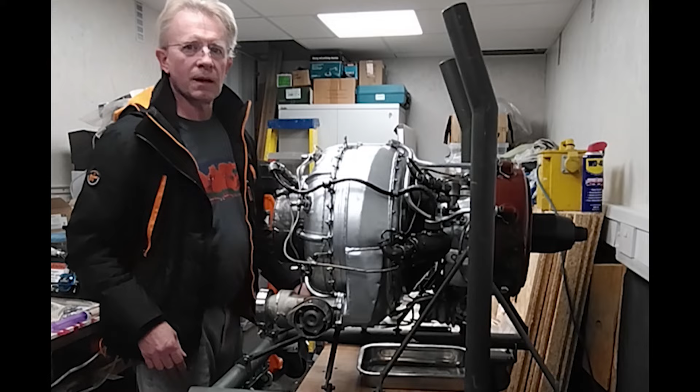Hi, some of you may have seen my AI-9 jet engine videos before, but today I'm going to go through a build. This is the engine that we're actually going to see by the end of the day. At the start of the video it'll all be in pieces. One problem I came across, it's rather a long build. It lasted 3 days, so I'm going to split the video into 3 parts.

So this is the engine we're going to be looking at. It's a single stage gas turbine used by Russian military and commercial airlines. It's around about a 50-year-old design, so a lot of these engines that have been in circulation have been changed for electric starter motors, because this is basically what it is, a starter for the larger engines on aircraft and helicopters.

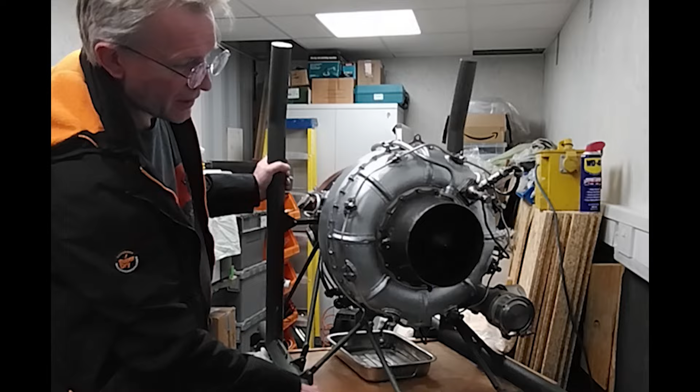The idea of the actual machine is we've got a valve down here, which is the key part of this engine. It actually spins up to a core speed of around 40,000 RPM, and once it really gets going, we can open this valve and that will produce massive amounts of airflow. That gets piped down to the big engines, and that will spin the turbine blades in those, and it will start each engine. It's used to start each engine in turn.

With this being the older model, the newer ones actually have a generator on the back and can be used to generate power for batteries and what have you. Yeah, I got a pair of these engines. I've been demonstrating one for a while that I've actually built. This is the one that needed a bit of a rescue.

Made components for it. I've got my own little workshop, and we've actually made different casings, some aluminium castings. There are some special high temperature bearing seals that we've made. We've made a plenum chamber cover, which is this one here, the green part. So we've made quite a few different bits and pieces, and this is the culmination. I haven't started it yet. That'll be another video that comes later. So yeah, take your time, watch the video, see what you think.

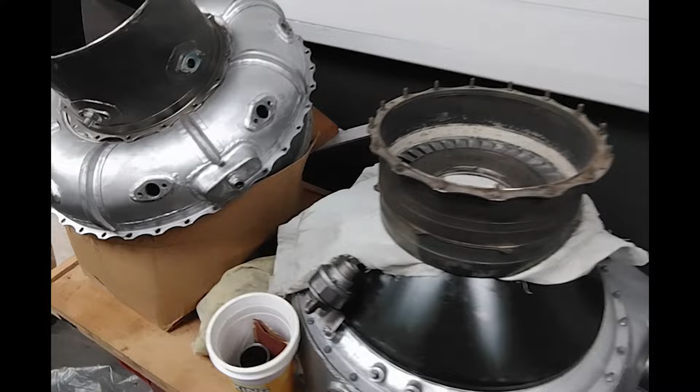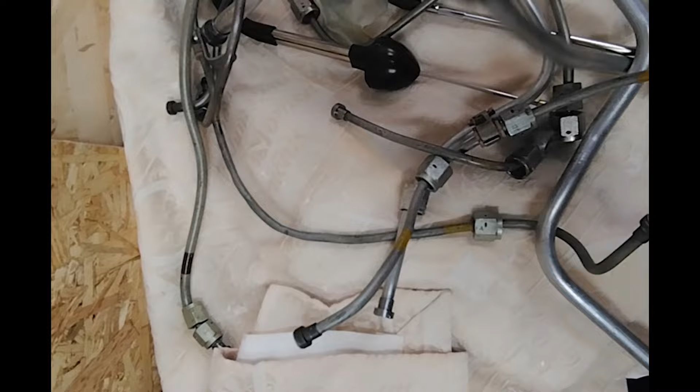As many of you know by now, I've started stripping down my AI-9 APU jet engine. It's all in parts. It's been like this for about a year now. Boxes of bits, parts all over the place. I've still got to get my act together and get this sorted. I've just about finished with the last components on the lathe. I managed to get a pair, one of them being completely knackered, and that's the one I'm rebuilding today, and the other one was in reasonably good condition. We were going to use the second one as the donor machine.

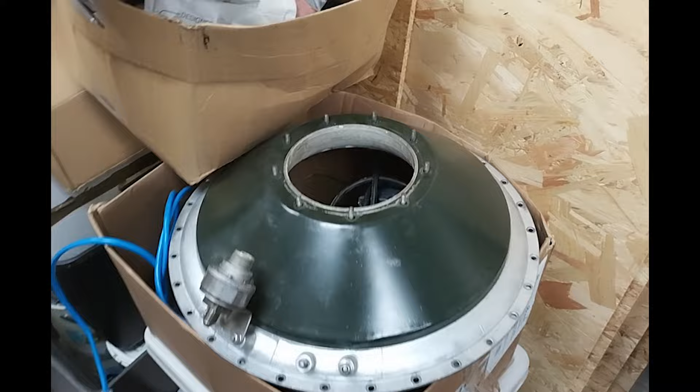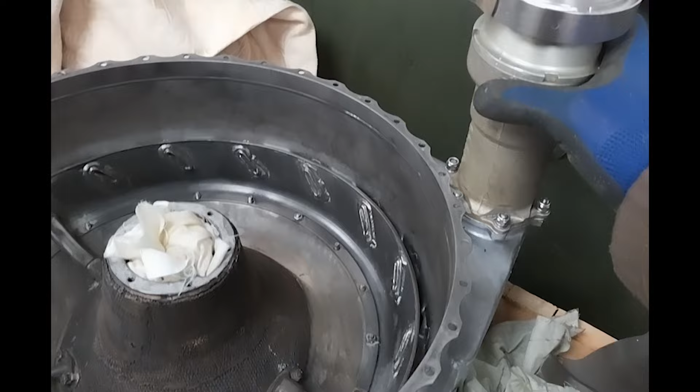But what we've had to do with this is make a lot of parts. The casing, which is the plenum chamber, had to make this as well. That's all made of aluminium. Unfortunately, the air valve, the KP9 I think it is, was actually snapped off and missing, and miraculously I managed to find one on eBay described as a part of a Russian spacecraft. I recognised it and managed to get it for about 60 quid, so that's good. A quick cleanup, and that's back on here.

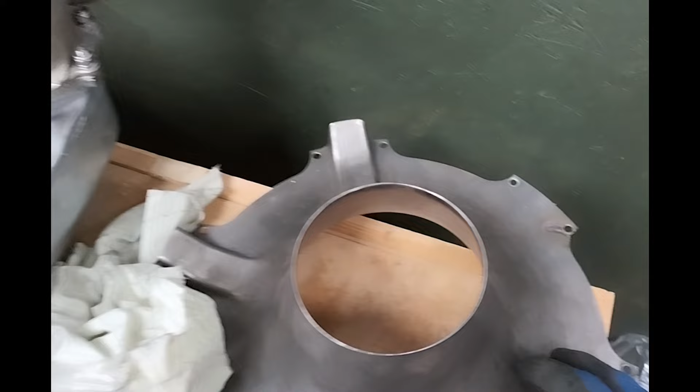I've had a few little problems with the engine. There were a few fatigue issues where we found some cracks. I've had some special welding done to clean that up. Also, quite a few of the castings were broken off, and it does help to have one of these manuals so you know what you're working with.

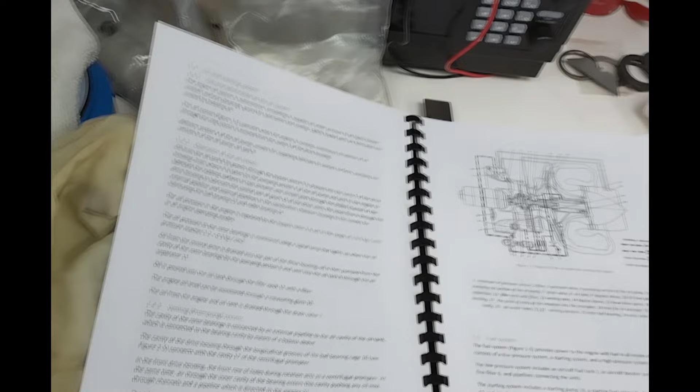So the manual that I've put back together, this was originally all in Russian. It's now in English. If anybody actually wants a copy, just drop us a message and I'll sort you out. Inside, I've created my own control system running off something called an Arduino. So again, if anybody needs that information, that should all be in here. I can get the software and the control systems.

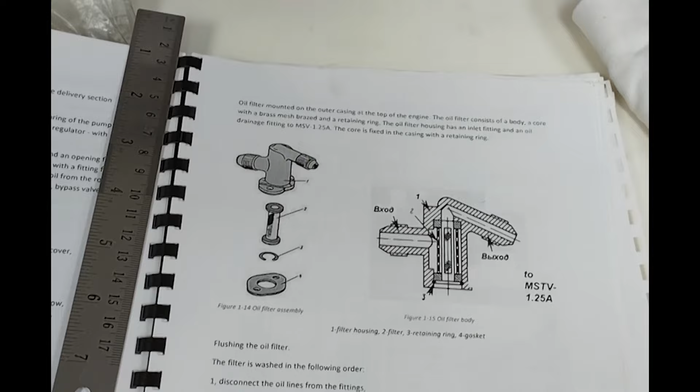One part that was particularly tricky was the oil casting, which, like I said, was snapped off and missing. So I ended up saying, what do you do? You're an engineer. You can either give up and throw the thing in the bin, or actually try and make your own. And that's what I came up with. I had an original one that I could use as a pattern. It's got an oil filter in the center as well. It's probably as good as the original.

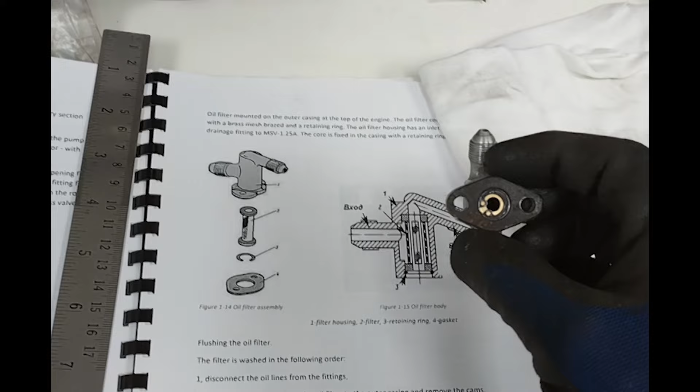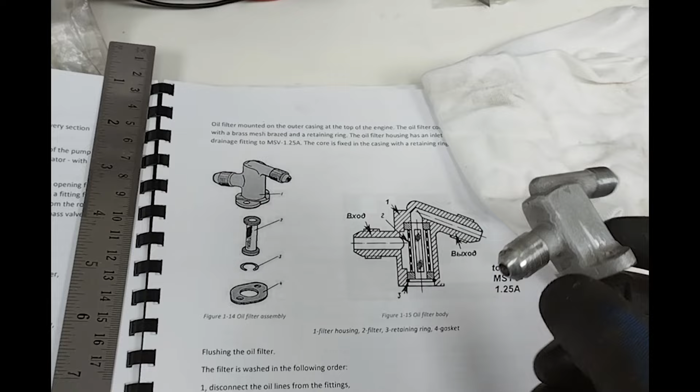We are talking Russian technology, but it's all got the correct thread, and that was made out of a billet of aluminium. And to make it look a little bit more fitting, it was sandblasted to give it that sort of casting look. As well as that, there's a few other bits and pieces I've had to make as well.

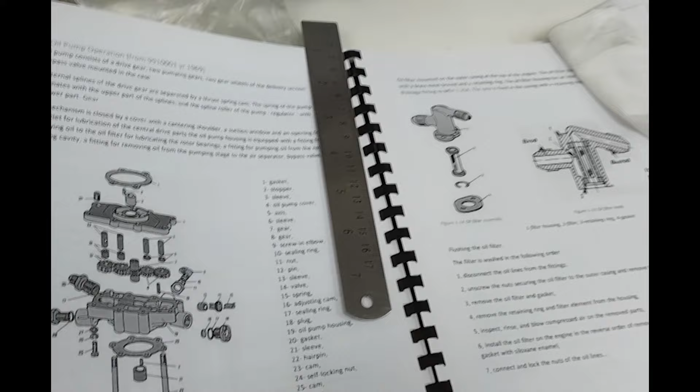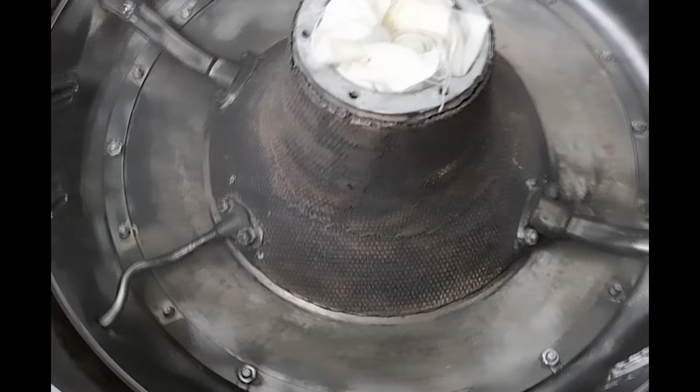One of the key things that you need to be aware of if you're playing with jet engines is the older ones tend to have asbestos. And when I took one of these things apart here, I actually found some. It generally looks like some sort of material. Don't play with it, just leave it alone. If it's falling apart, you've probably come to the end of the line with the thing.

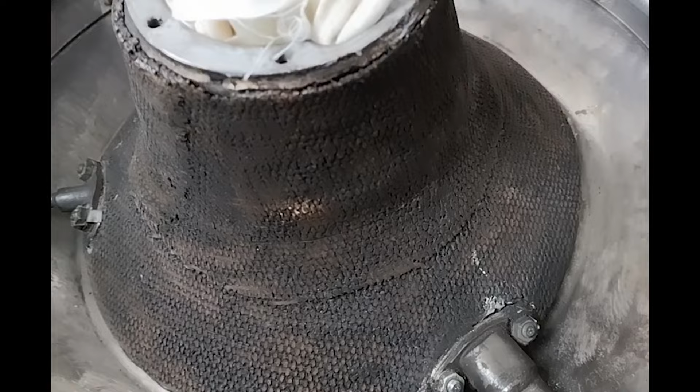But on this engine, when we took the case off, it still looks as if it's in good condition. It's not flaking, it's not falling apart, so we don't want to touch that. All we'll do is just carry on and rebuild around it, and that will probably last, at least for our test purposes at any rate.

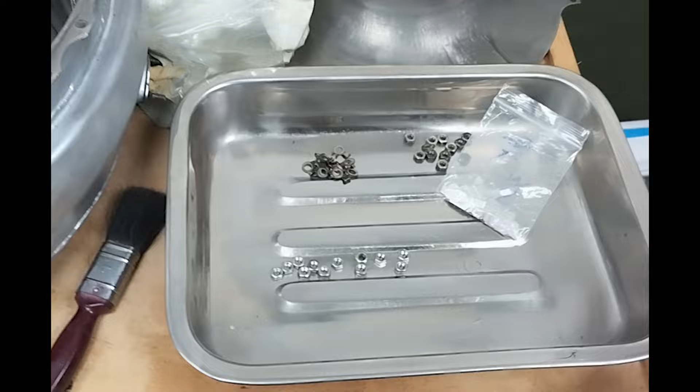Okay, so what do we need to do first? I would certainly think about making sure you're using clean utensils. I've got some stainless steel fat pans for cooking. No, I didn't steal them off the missus. These are off eBay, probably useless for real cooking, but absolutely ideal for engine cleaning and components and things like that. All the rest of the parts I've got have either been patched up, re-welded, all the sort of stuff you could normally get by and do yourself.

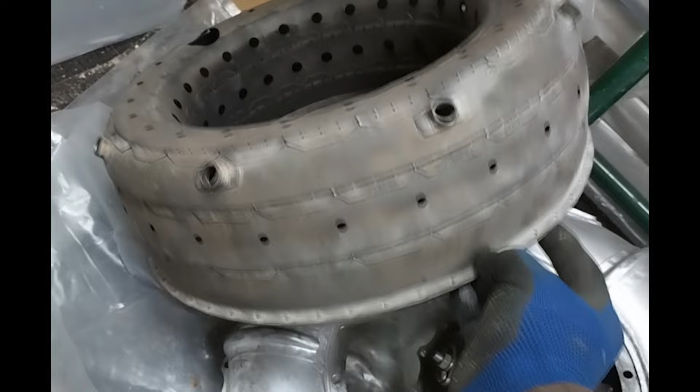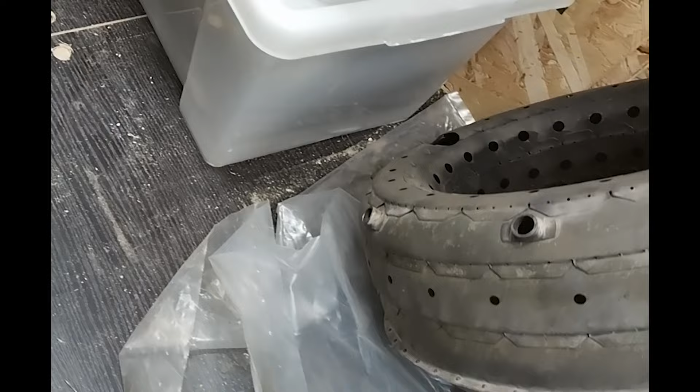So here they are. Remember, these materials are probably exotic metals. They don't always weld as easy as you thought they would. Fortunately for me, the outer casing is just standard steel. But if the combustion can had actually cracked or something like that, I think we'll be either looking at riveting or potentially maybe arc welding or spot welding to do a repair.

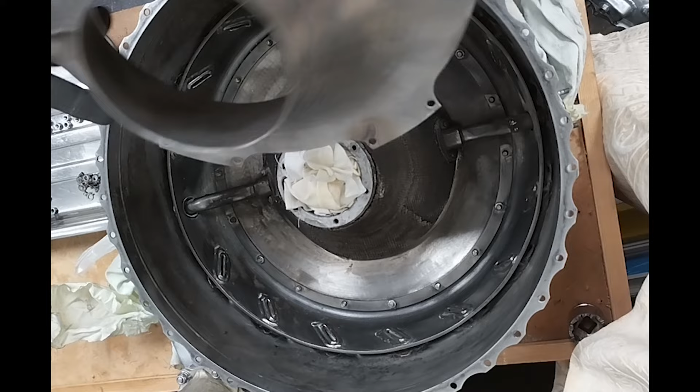Okay, so first off, we'll put the flame arrestor. This stops the actual heat from where combustion's happening pressing back and heating more pipe work. There's also an asbestos heat shield in there as well. And when we originally took this out, we noticed a small crack here. Now if we'd left the crack in, with the vibration that crack would have carried on all the way up and completely ended our story on this one. So first of all, let's get this in.

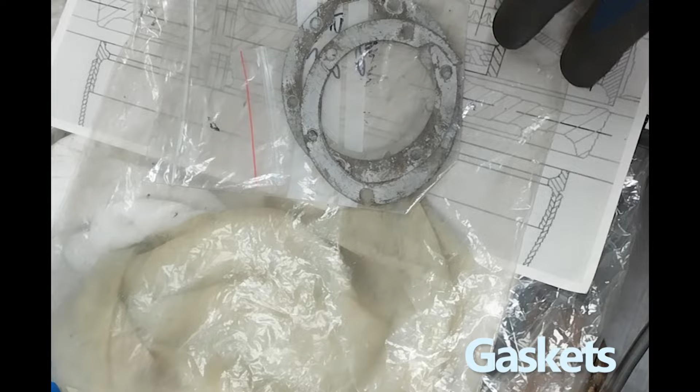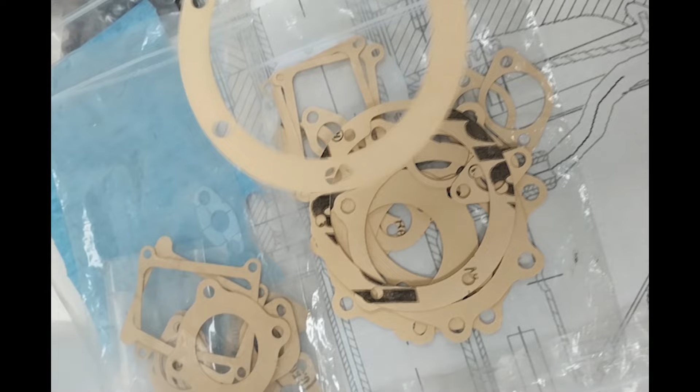Just a quick thought about gaskets. I always keep my old ones. I know they look a bit disgusting, but the idea is that I can start measuring them up and draw CAD images of them. Once you've done that, you can then cut your own gaskets, and these are new ones. I did this with a plotter, replaced the pen with a knife, and as you can see, it makes quite a good job, hence why we keep the old gaskets.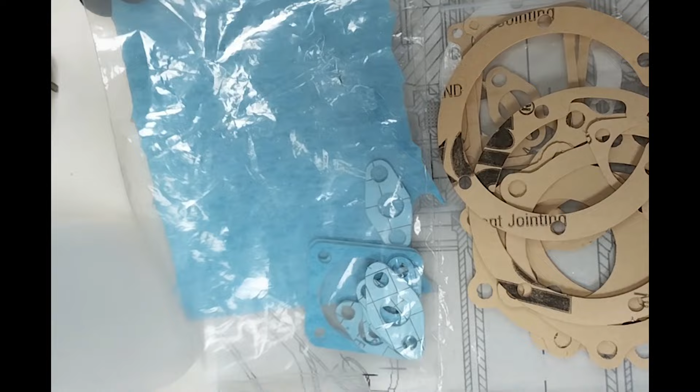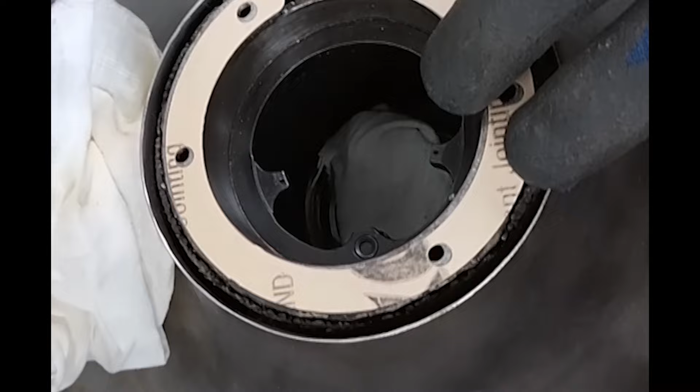Done the various fuel system gaskets as well, and also where you've got a lot of high heat, because again that can sometimes faze people. You can't use normal gaskets. We've got this asbestos free, and I managed to get this off eBay, and again similar sort of thing, cutting the gaskets out. But anyway, that's what we're going to be fitting. See how this fits over, and this should fit on there, as you can see. It's just because I haven't poked out the gasket yet.

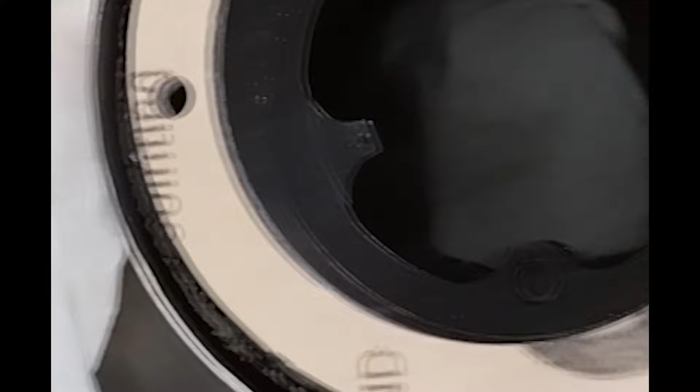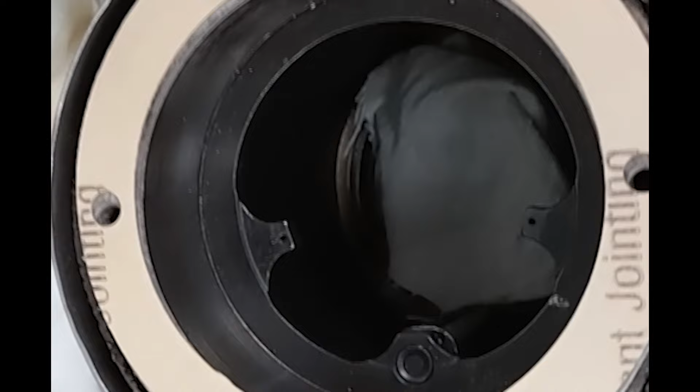What we're going to do next is these little tiny holes here. These are oil injectors. They actually spurt oil directly at the bearing whilst it's running. So I'm going to reverse fill that with isopropanol. I normally do it with a syringe. So I fill a syringe with the stuff, then inject it into the hole and catch it as it comes out the back end. It makes a bit of a mess, but the oil way is then cleared, making sure there's no dirt that's got in there. Okay, so isopropanol.

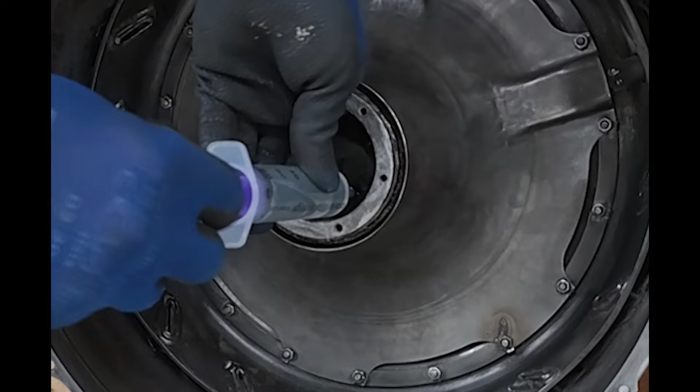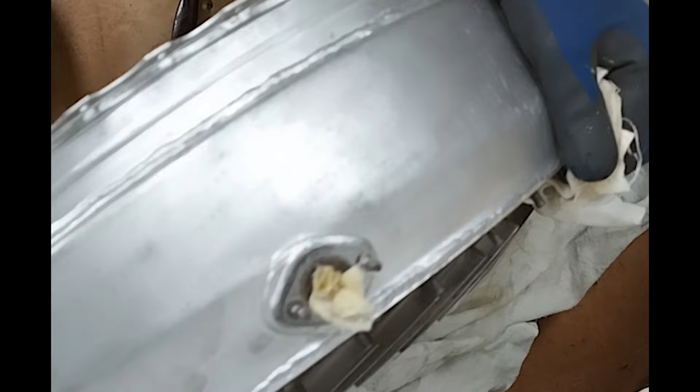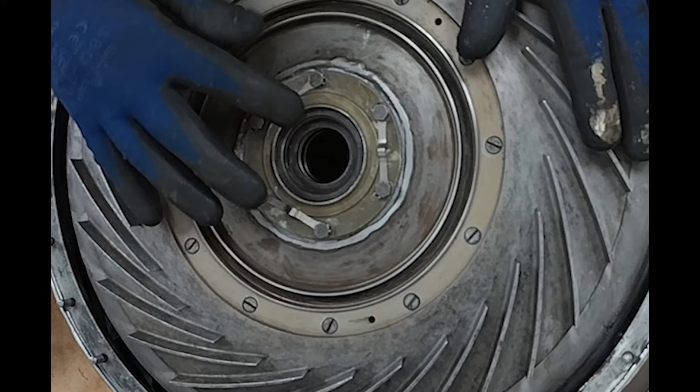Now on this particular engine there's a carbon washer that sits between the main bearing and the compressor wheel, and it's held in by a labyrinth seal. So I'm just going to take that out. It's on the top, there's like 2 small rings, and then the carbon washer. Okay, so I need to keep those in the right order so I don't put them back incorrectly.

The actual bearing is a split race, which is a little unusual. One thing to note on them, and quite a lot of high-speed precision bearings, there'll be a little marker. You can see that? A tiny V. And there'll be one on the opposite side as well. When we're assembling it, those V's have got to be lined up, which can be a little bit tricky. Sometimes I use a camera at one end so I can see what I'm doing.

The inside there is just hanging one of these. It's upside down, but it won't drop through because it's where the oil inlet is. It actually stops it coming loose. Just drop that back there. Leave it out for a moment. Okay, so I'm just going to inject a bit of isopropanol.

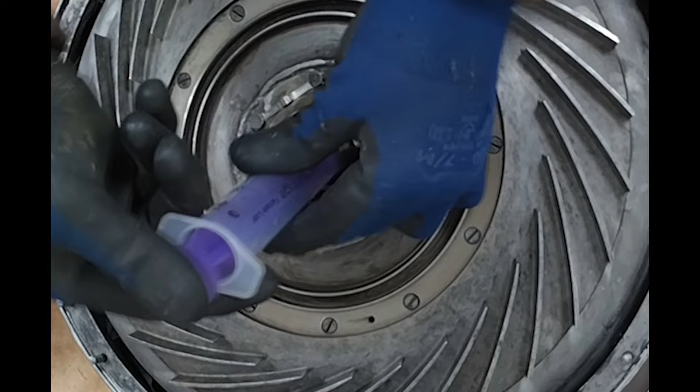Don't worry about losing this stuff. It's better to actually have clean bearings than ones with bits of muck in them. It's quite a watery compound. You can actually hear the rattle of the bearings and what have you. That's okay at the moment, because once we've actually done this, we'll put a bit of oil in.

Okay, what I'm not going to do here is start wiping around, because I've actually got the main bearing there. What I'm going to do is use a bit of WD-40, spray a bit into a rag first to make sure we've not got anything loose. Line the chevron plate up, put the washers back in the right order. Good.

Different jet engines use different mechanisms for seals, but it's unusual to see a rubber seal here because of the temperature that they're running at. Tolerances are quite tight. The shaft that drops through will be quite close to that carbon washer in there, and the idea is it tries to stop the pressure that builds up at the front entering the oil way. I've had that on a previous engine, where the pressure at the front found its way into the central oil ways where the bearings are.

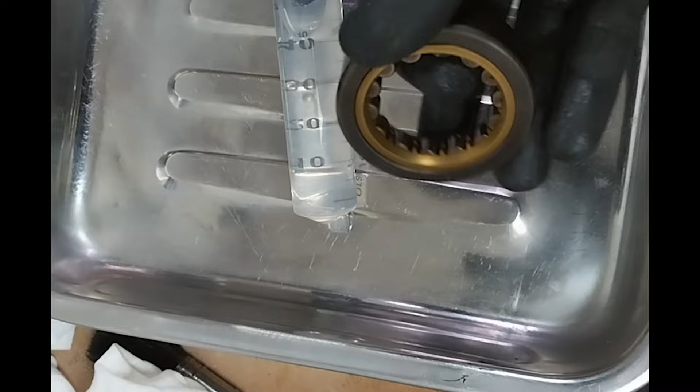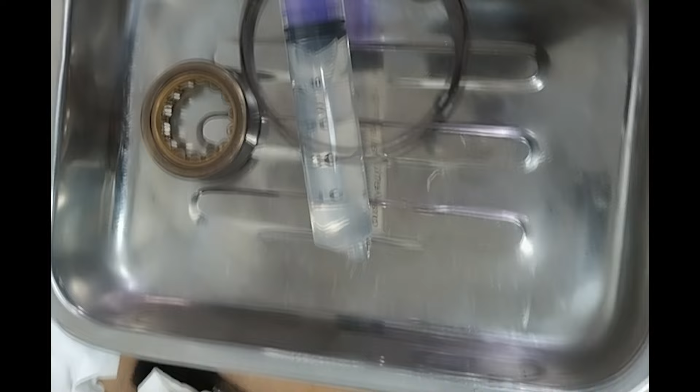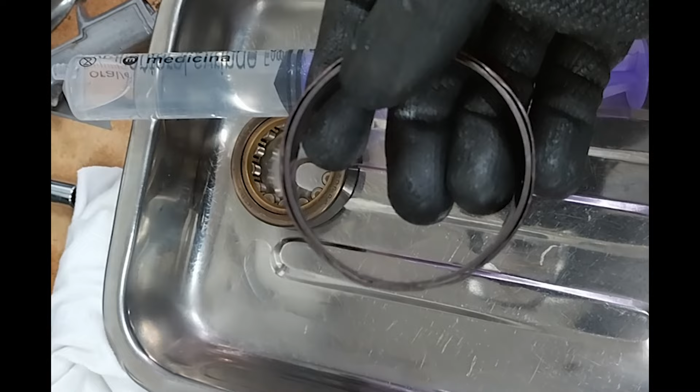So in comes Mama's baking tray with a bit of isopropanol. I'm going to wash out the rear bearing before I install it. The Russian units, which is quite unusual, but works quite well. The bearing sits in this, and this allows the bearing to vibrate within its housing very slightly. There's an outer ring and an inner ring. The outer ring has very small undulations, a bit like corrugated roofing, and that allows the inner ring to flex in and out very slightly, allowing any vibration on the bearing to be absorbed by the ring. So yeah, quite a good idea really.

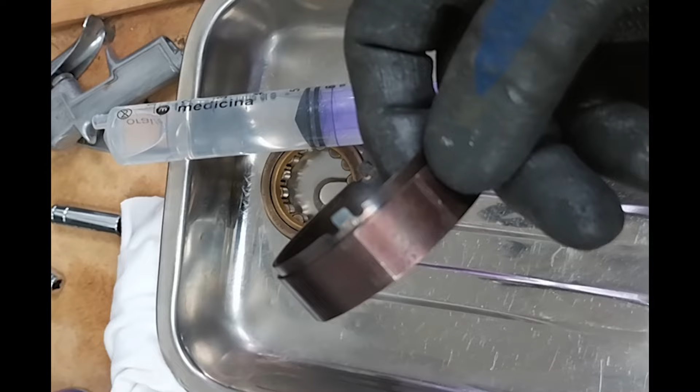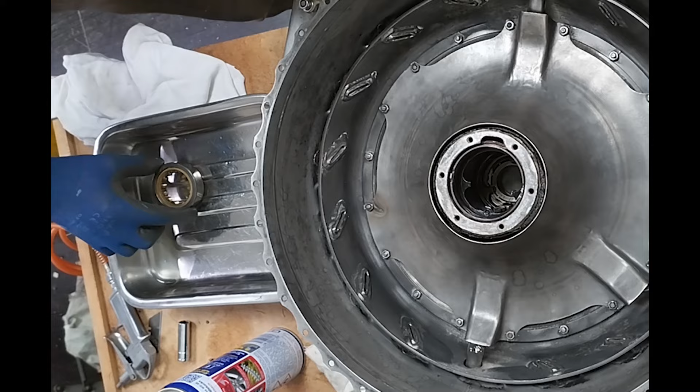This one I've had to repair, a little bit of welding there. A friend of mine is a lot better welder than me, and he was able to tack these back on because we'd had a bearing seizure in one of them. Bearings run at 40,000 RPM, that's the standard for these, probably for an APU of this size, but full-blown jet engines that produce thrust may run in the region of about 90,000 to 100,000 RPM, so they're a little bit less tolerant on vibration. Okay, so let's wash out the bearing in isopropanol and then we'll put that in.

Two lugs, they fit into the main cap. Look at that, there's two little lugs here, one, two, and that stops the outer ring from moving around, so the outer race will sit fixed and won't rotate around with it. But the ring around the outside will allow a little bit of give. At the bottom of the cap, there's a series of holes that lets the oil drain out. And I missed this quite a few times when I first took them apart: you see this unusual looking surface here. I thought that was a lot of carbon buildup. That's actually a high temperature surface.

I've remade this using various different materials on the lathe. Being an engineer, you'll come up with different ideas. This was using something called quick steel. I pasted that on, put it in the machine, brought it back up to its original sizes, and it's good for around 1000 degrees C. I only expect this to run around 300 to 400 at this point. That is the only seal there is. There's no rubber seal on this at all. So let's refit the rear bearing.

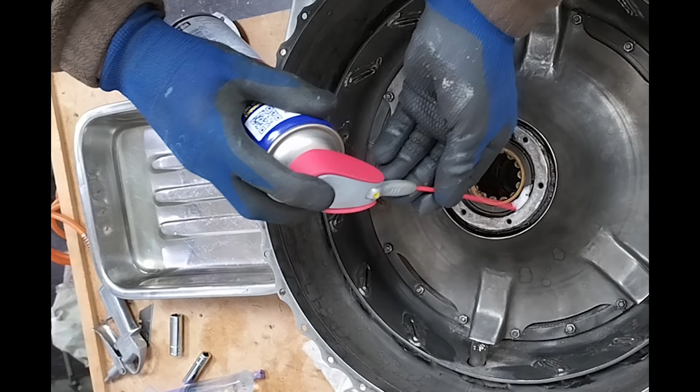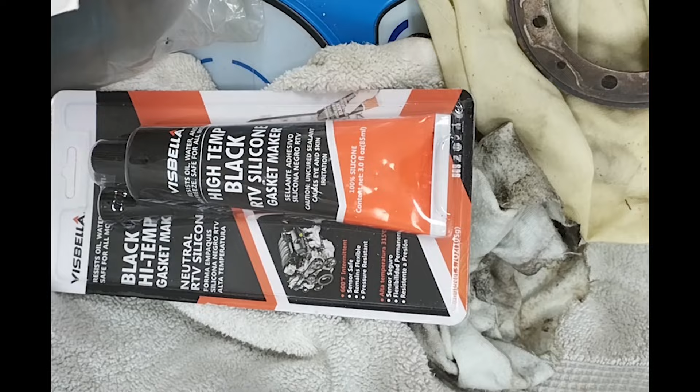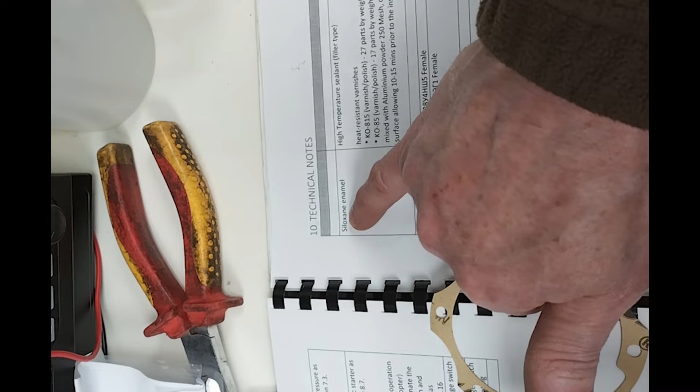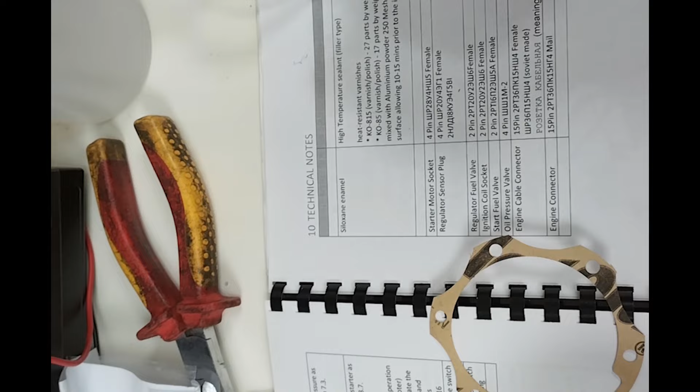But according to the details here, a lot of the old gaskets have what looks like an aluminium coloured paste on them, which is high temperature sealant. My translation of the Russian sealer comes to siloxane enamel, high temperature sealant filler type. So they have aluminium powder at 250 mesh mixed with a high temperature lacquer, which in my case will be this stuff here, just general clear lacquer. I'm going to spray that into a can and mix some of the paste up, and in theory that should give us the same compound needed to seal the gaskets. Let's give it a go.

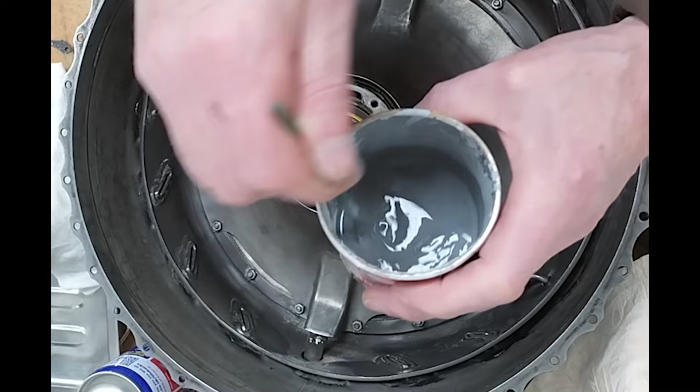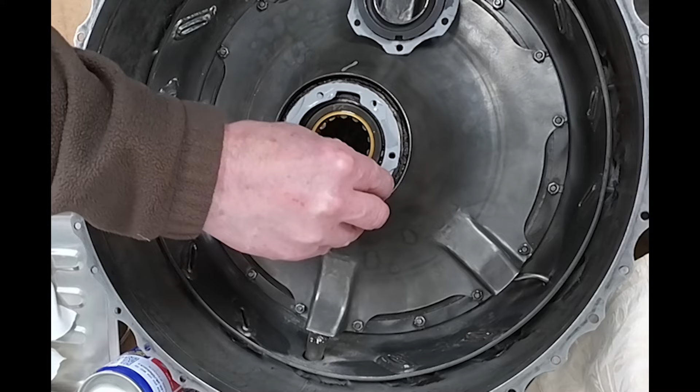That's what it looks like. Aluminium and lacquer paste. What we've got to be careful here is not to put too much on, in that we end up getting it in the holes of things. It does tend to go off quite quick, this stuff. But all I want to do is just put a thin layer on before I match it against the gasket.

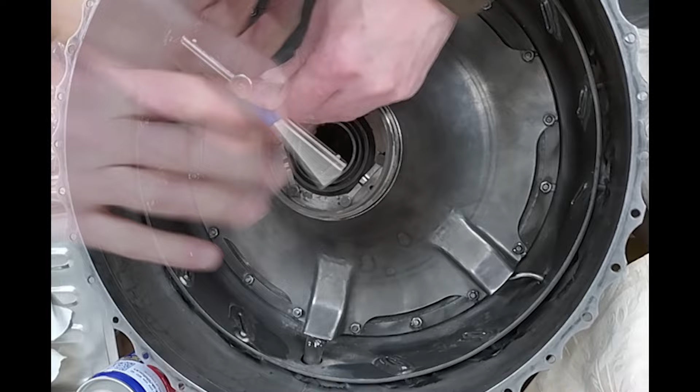And we've got the outer ring as well. Okay, very similar to an engine block. Do opposites. Quite important that this seals properly. So just roughly tighten up to get yourself going. Okay, right, each stage, once you've done, cover up. I'm going to go and actually have a look at the main drive shaft. I've got to actually tighten those tabs.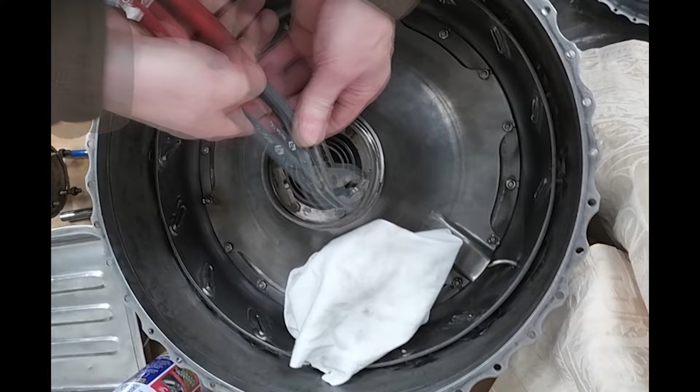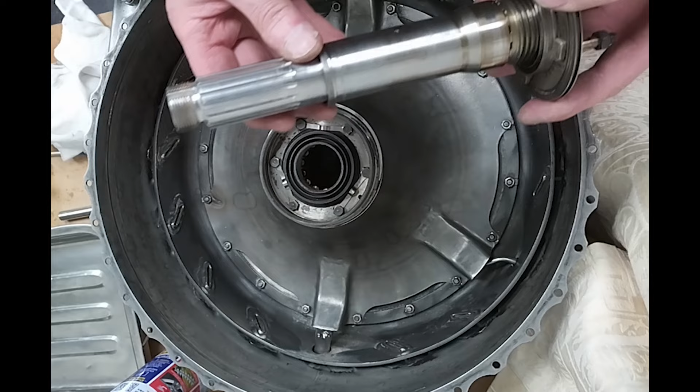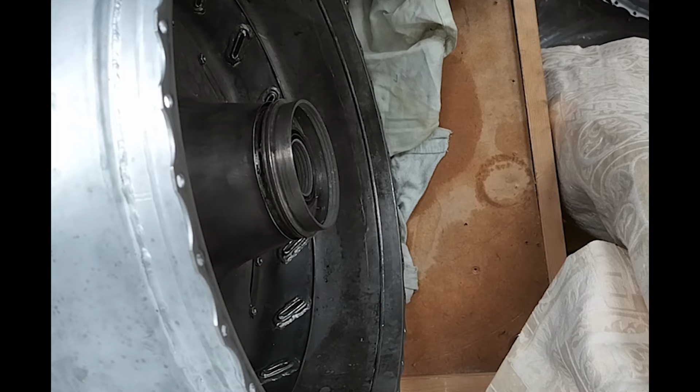Okay, so that's as far as I can get it at the moment, and that's because the actual inner races are tight on the shaft. So I'll turn the machine round so we can see the other side and see what we've got there. Okay, so I've actually lined the V's up on the bearing, and then I've actually got the shaft through. I need to actually add the little washers and what have you. Again, checking the numbers. 5304 seems correct.

So that's gone first. Now, if you haven't actually put these in the right order to start with, then it's always handy to have a drawing. I just happen to have the assembly, and that gives me the correct sequence of washers and what have you. So that's what I'm building now.

So here's the, and again I've got to keep the shaft pretty steady, otherwise if it moves I'm going to move those two V's. Here's the carbon washer. It's got to go in pretty straight, otherwise it won't go in at all. I'll end up breaking it. There we go. There's this packer, and that actually stops the carbon washer being crimped. Then we've got the labyrinth rings, remembering to offset the breaks. Then we've got the final cover washer.

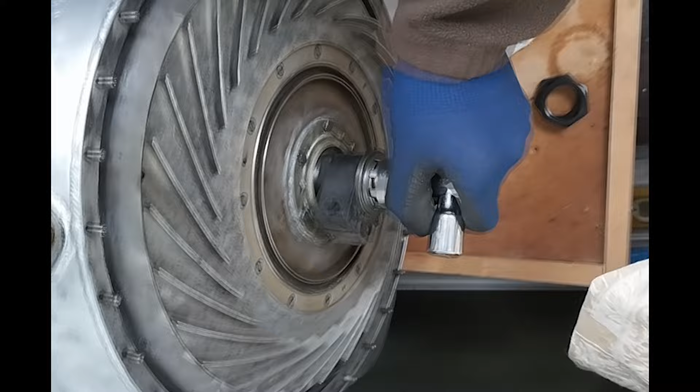Okay, and now we need something to pull the shaft through. So we could use a tapping hammer, but I've got some of these spacers, they will do. And the modified socket. So all I'm doing is just tightening the shaft up, and that should pull it through the two bearings without having to use a hammer.

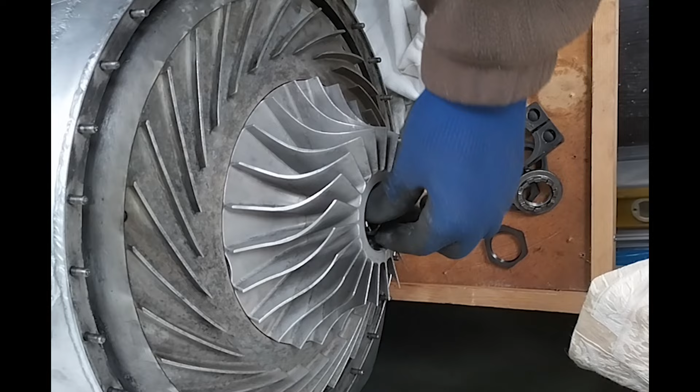And then for the beast, I've pre-marked this with a small pin punch there, because at the time I didn't know where the keyway was, so I've actually notched it in there. And then I'll actually line this up. Okay. So we're not far off. So what I'll do is I'll tighten that up in place, and then take the nut back off, and then add the washer afterwards. I made this mistake once before and ruined the engine. So good.

Okay, back onto its side. So we've pulled it through. The bolt's about ready to be tightened. But before I do that, I'm going to put the lock washer on. I've had a bit of trouble with this before, so I'm going to put a little bit of oil on there and on here. Okay, drop that in. Put that down there. Now remember to actually align the keyway with the spot that I made earlier. I'm going to use the special socket.

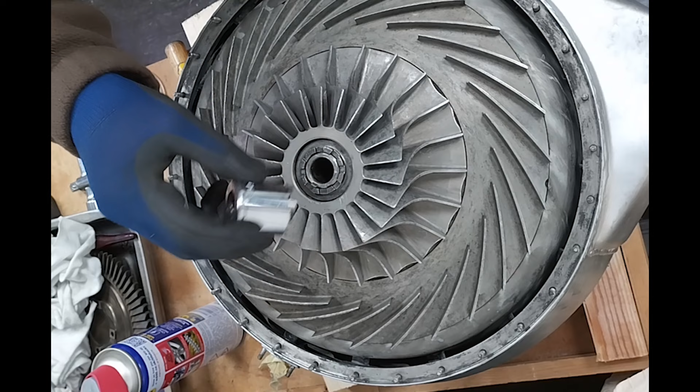Unfortunately, we've got no torque settings, and I've tried doing this before with the torque wrench, and it's very difficult to actually try and hold the turbo whilst we're tightening up. Not very good, it didn't work. So we'll use this. So what we're going to do is just tighten the bolt as tight as we can. And I now need to just get that tab to align. So I've got to keep going. There's still a couple of degrees to go before we're lined up. Use the hammer.

Good. We've got a little bit of rub because I've got new thermal seals on the back. They're like a hard, sandy material, so we can hear that. Plus the bearings are a bit dry at the moment as well. Good, okay. This is the part next, the plenum chamber. This will go on like this, I believe. Yep. So what I'm thinking here is I'll probably put this on loose, turn it over, work on the other side, and then we'll come back to this in the end. But I need to make sure that this is protected, otherwise, like I say, I could run into trouble.